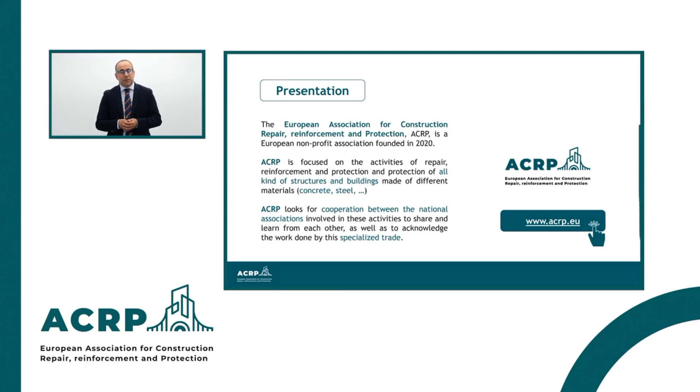So what is ACRP? It's the acronym, the short name for the European Association for Construction, Repair, Reinforcement, and Protection. It's a very long name, but it's an association that brings together everybody related to the maintenance of any kind of structure or building, no matter which kind of material. Most of the associations that are members of ACRP mainly focus on concrete, but we include everything, since some associations also do extensive work with steel and masonry structures.

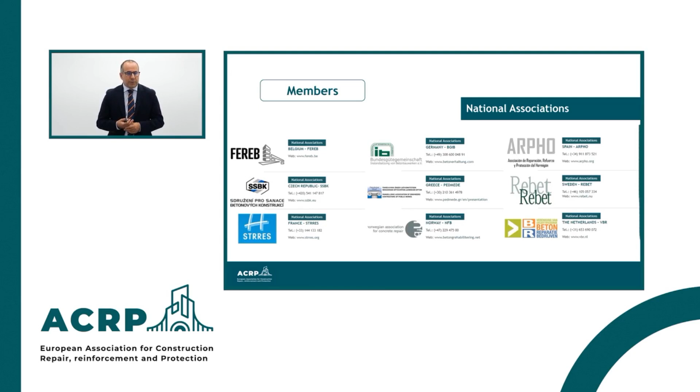This is the current membership when it comes to associations. You can see here Belgium, Czech Republic, France, Germany, Greece, Norway, Spain. We also have individual members, and importantly, from the beginning it was decided to allow institutions to become direct members, so we already have the Finnish Transport Infrastructure Agency, and we expect more public administrations to get involved.

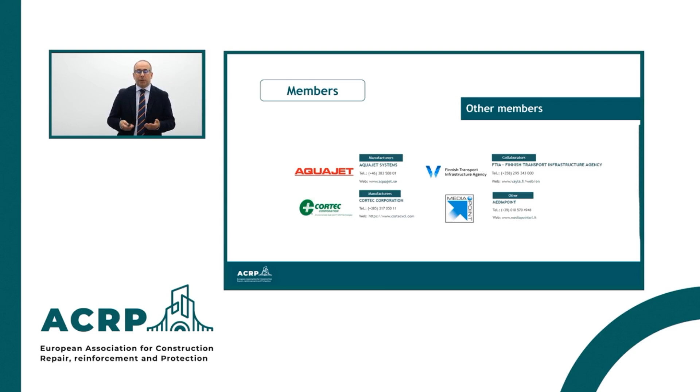To achieve our mission, which is to promote the maintenance of constructions, we need to bring together everybody: the companies that do the work, contractors, manufacturers, engineering companies, associations, asset owners, which in most cases are public administrations, and to exchange best practices, current regulations, ideas and expertise when it comes to training. Mainly, we want to create awareness about the need to maintain what we have built.

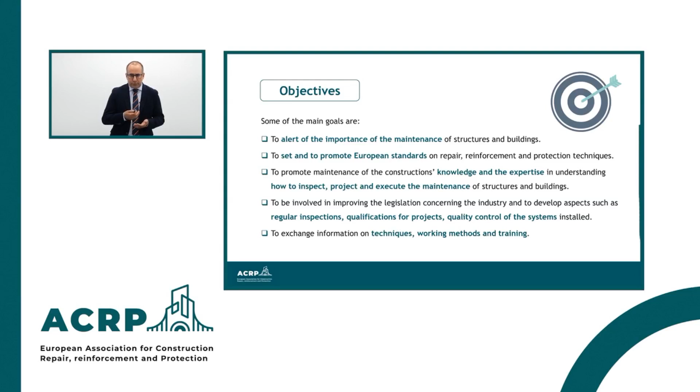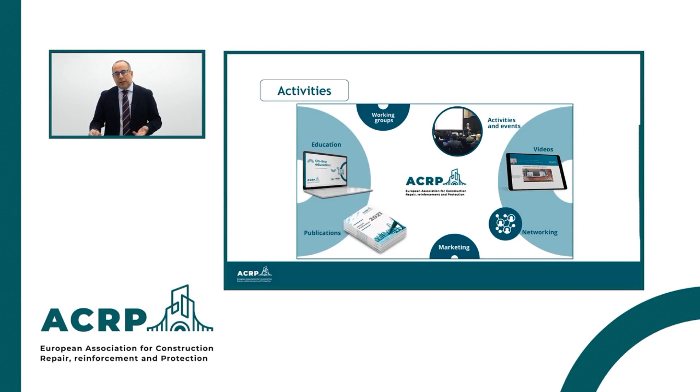So we need to develop the knowledge and expertise to inspect, to project the maintenance, and also to execute that work, through inspections, projects, and quality control. We do multiple activities: working groups, online contents, education, and regular meetings. At this point we have 3 working groups.

And I say at this point because probably next year we will have a couple more. Last year was the first year we produced the ACRP special publication. This year we're going to change the name, and it's going to become a yearbook.

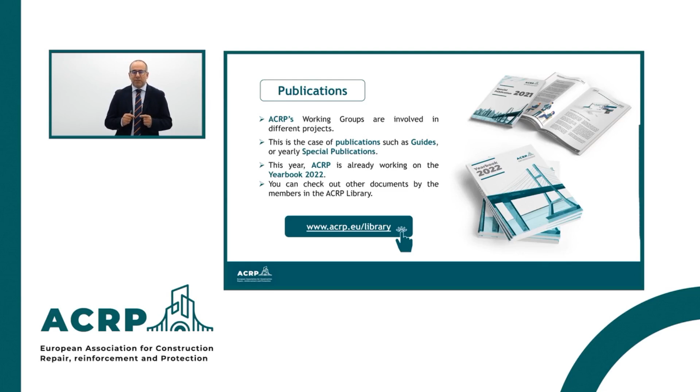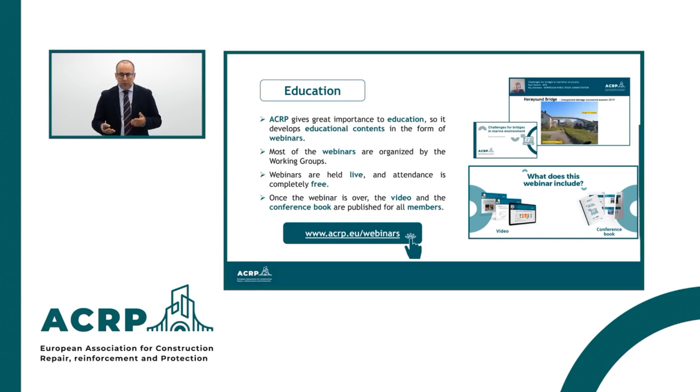We are also doing, as I said before, some webinars. The webinars are free of charge for anybody, so when they are done live, anybody can participate and watch. Once they are done, we keep the recording and the conference book, which is available for members on the website of the association.

We are producing some audiovisual materials, and we are also trying to publish audiovisual materials that have been done by the different national associations. So you can go to our website and see some of the contents that are available.

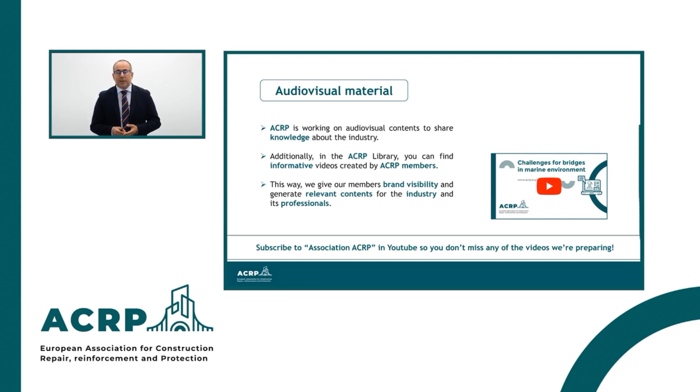Like any other association, we also want to do events, and I say we also want to do events because ACRP was started in 2019. We had a meeting to finally decide to create the association after several meetings among different national associations.

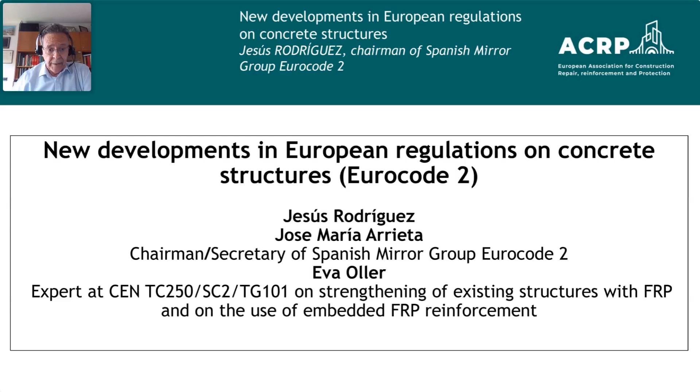Concrete is only one of the possibilities, so in each case we need to use the corresponding Eurocode. In the case of concrete, it's Eurocode number 2, together with the basis of design.

That's Eurocode 0, Eurocode 1 on actions, Eurocode 7 on geotechnical design, and Eurocode 8 on design of structures, combined with the national annexes for application in each country.

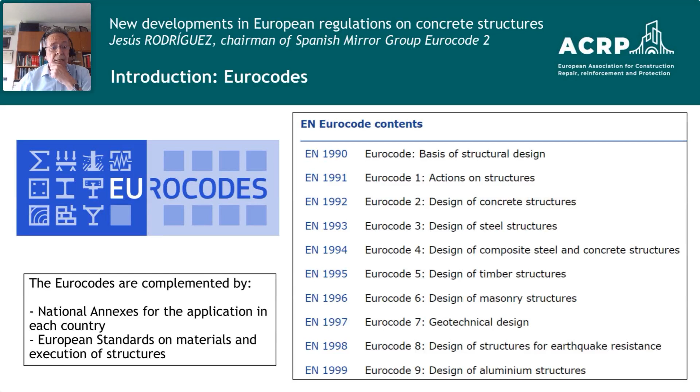And also of the European standards on materials and execution of structures. So why are we revising the Eurocodes? Because the Eurocodes exist from the beginning of the 2000s, and it is aiming to reduce the number of what are called nationally determined parameters.

These are values that can be determined by each individual country, to improve the ease of use, to incorporate the recent results relevant to innovation.

Also to incorporate everything related to the contribution of structural design to sustainability, and to provide background documents. In the specific case of Eurocode 2, we now have a background document of more than 1,000 pages supporting what is new.

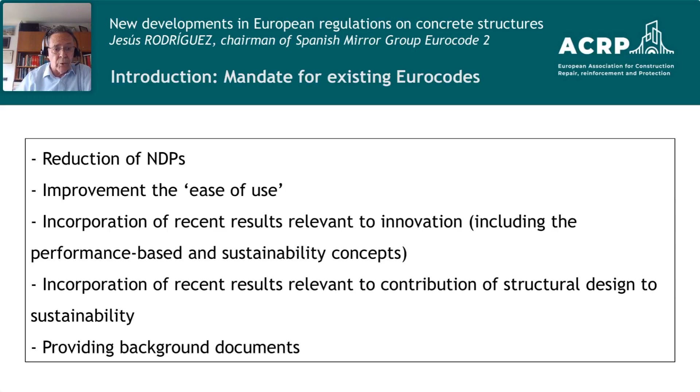What is now new in the present version of the Eurocode. So the Eurocode we are going to deal with today is only Eurocode number 2, on design of concrete structures.

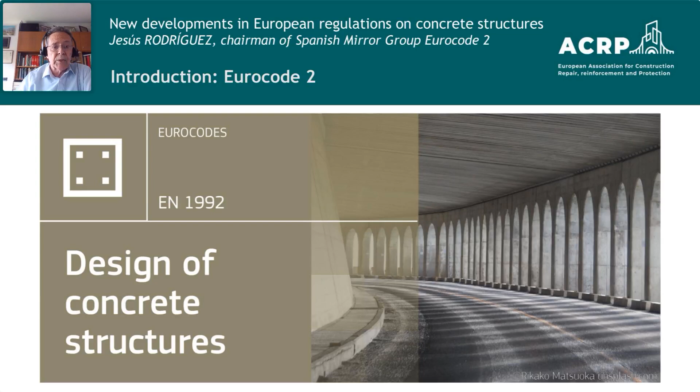And during this short webinar, between Jose Maria Arrieta, Eva Oller, and myself, we will try to present some of the main modifications.

And some of the new contents that were not included in the scope of the previously available Eurocode that was approved at the beginning of the 2000s.

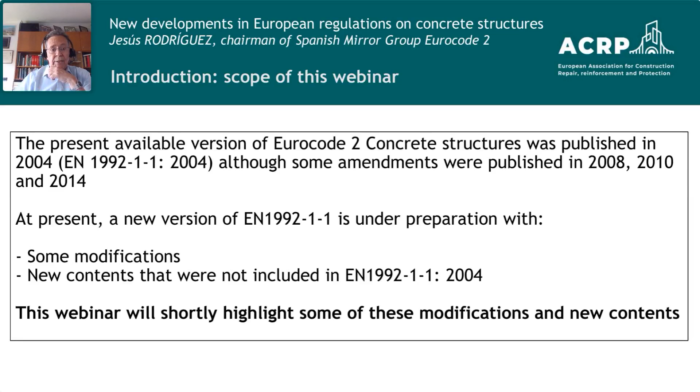So the webinar will only present shortly some of these modifications and new contents. The first group is related to those topics that were covered in the previous Eurocode.

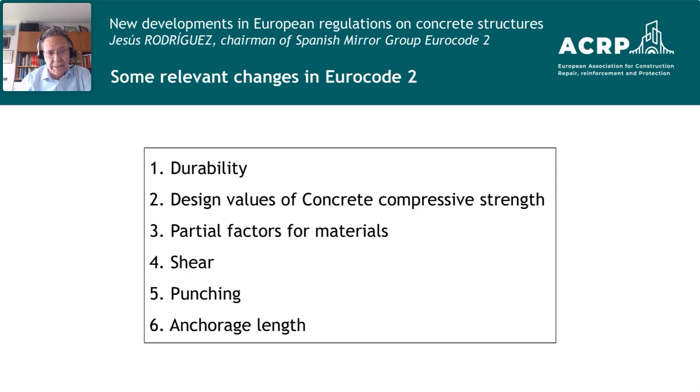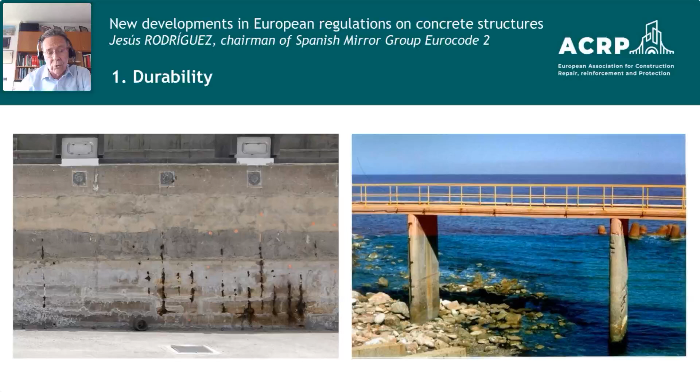So the first topic is durability, and in this case we would like to emphasize some of the questions, some of them related to corrosion of the reinforcement, although they also cover other types of deterioration in concrete structures.

So again, the Eurocode includes the exposure classes in a similar way to the previous versions, with slight modifications on different exposure classes.

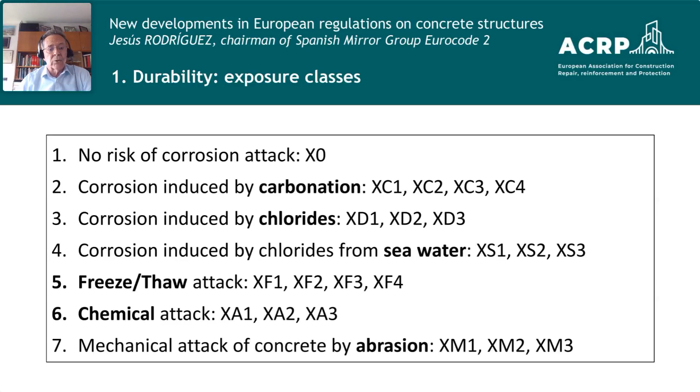Related to chloride attack, carbonation, chlorides from seawater, freeze-thaw attack, chemical attack, and also mechanical attack of concrete by abrasion. The new content of this Eurocode is related to what is called exposure resistance classes.

It's a way to define the quality of the concrete to be selected for the different exposure classes, and it is going to be related to the minimum cover size, considering carbonation and chloride damage, or also freeze-thaw, etc.

These exposure resistance classes will have their definition included in another standard, the one dealing with concrete, EN 206. It is expected, since it's still under discussion in the corresponding technical committee 104, that there will be two ways to approach the definition.

One is through prescriptive rules for mix composition, especially for conventional well-known concrete mixes, or by other ways, such as short-term performance testing.

In order to deal especially with new concrete compositions. So this is a crucial new element we need to take into consideration in the new content of Eurocode 2.

But the problem is that the definition, in order to be applied for these exposure resistance classes, is not the responsibility of Eurocode 2, but is the responsibility of the standard on concrete, EN 206.

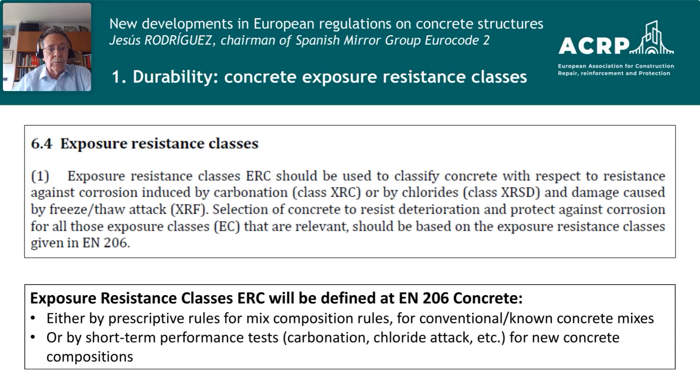So throughout these definitions, we have the typical tables for minimum cover size. In these examples, it's only for exposure classes by the attack of chlorides, but it's interesting to highlight that the ERC types...

Are defined, in the case of chloride attack, as a dimension of a diffusion coefficient in these units. And in the case not presented here in this slide, for carbonation...

This is based on the dimensions of the carbonation rate in millimeters divided by the square root of years. Well, this is a crucial new element that we are interested to finalize the knowledge on.

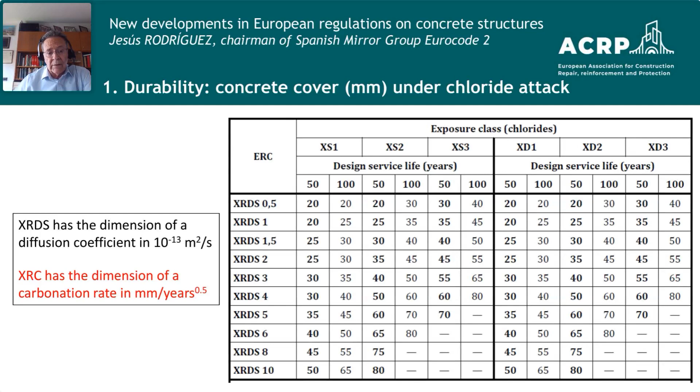This approach, which is not under the responsibility of Eurocode 2, but under the responsibility of the concrete standard EN 206. So I would like now to ask Jose Maria to continue his presentation.

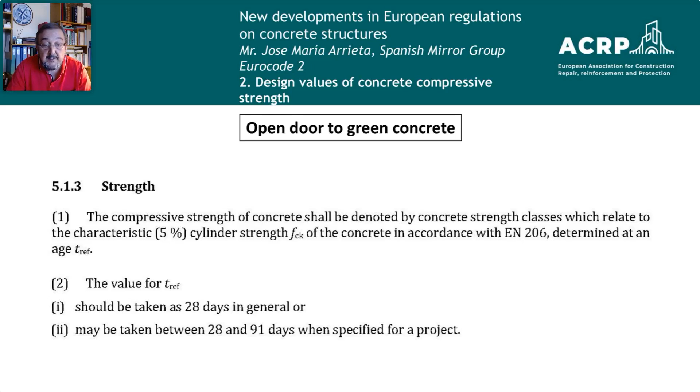The first one is the concrete compressive strength. This revision leaves the door open to green concretes' allowable age for the test higher than 28 days. Green concretes are produced replacing a portion of cement by binder like fly ash, for example. These concretes develop strength slowly, so it's necessary to test the specimens at a higher age. This is why now T-ref may be between 28 days and 91 days for this course.

On the other hand, we have unification of the design value of concrete compressive strength among the different behaviors of the structure - bending, shear, punching, etc. In the actual version, for each behavior, this design value is taken into account in a different way. We obtain the compressive strength from control specimen.

We obtain FCK from the control specimen. After that we convert this compressive strength into the undisturbed compressive strength of cylinder - that means plain concrete cylinders without reinforcement - and that conversion is made by gamma C, which takes into account not only the uncertainties of material and geometry, etc., but also this coefficient of conversion. So FCK divided by gamma C is the undisturbed compressive strength of cylinder.

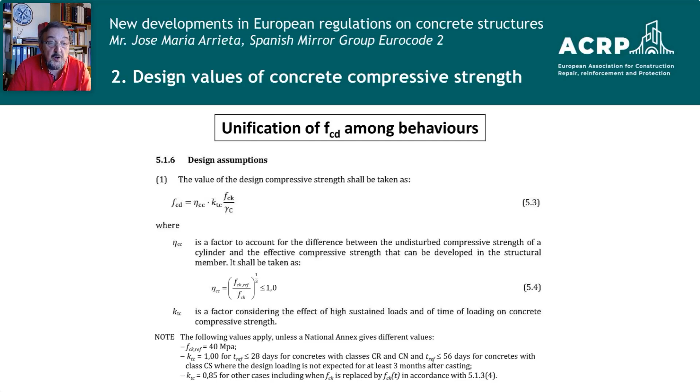Now we are going to do another conversion, to convert this resistance into the effective compressive strength in the structural member, meaning with reinforcement. When there is reinforcement, we have brittleness because of possible splitting of the concrete. So this coefficient eta CC is the conversion from undisturbed to real concrete in our structure. The expression is the quotient between resistance of reference and the characteristic strength of the test, and with that we unify this strength among all the behaviors.

Logically, when we are, for example, in bending, there is a difference. In the actual version, this brittleness is taken into account in bending, but now it's not necessary. So the formulation is easier because the limited strains epsilon C2 and epsilon Cu are now constant, independent of the class of concrete. Why? Because this brittleness has been taken into account by FCD.

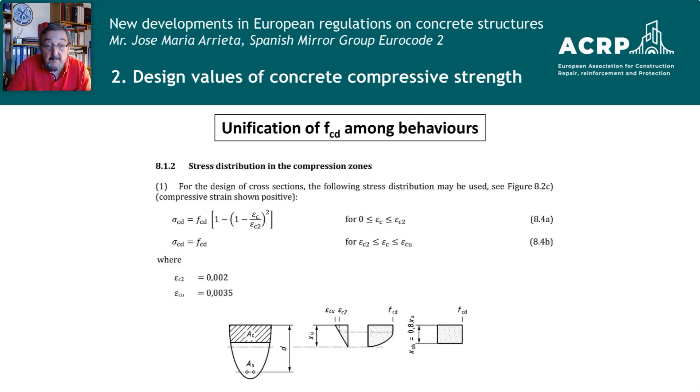Another subject is related to partial factors for materials - very important. The basic data assumes the basic coefficients of table 4.3, the usual partial factors for structures. Now we know exactly which are the conditions for this coefficient.

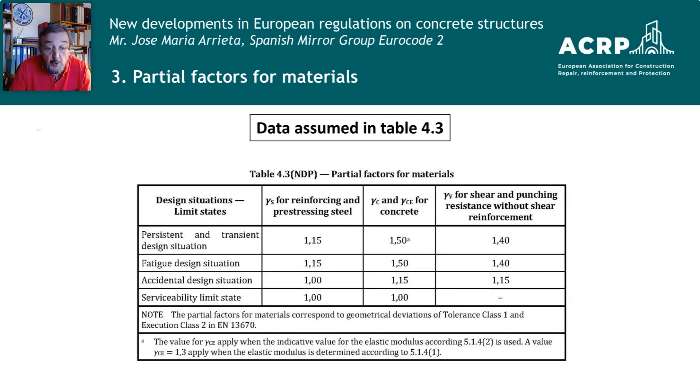We see that these coefficients correspond to deviation of tolerance class 1, execution class 2 in EN 13670, the execution of concrete structures code, and also correspond to some statistical data of the variables with the coefficient of variation and the bias factor. So, for example, for yield strength we have the coefficient of variation, also for the depth, also for the model uncertainty. With these values we obtain the coefficient of table 4.3.

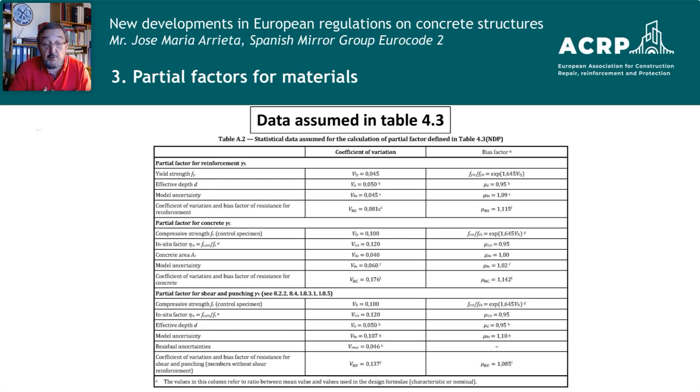That means that if our statistical values are different, since there is a procedure to calculate this gamma coefficient, we can modify it if, for example, our production of concrete has a coefficient of variation less than 0.10, as is supposed. This expression is all developed in Annex A.

We can see the different variables: the sensitivity factor, which usually is 0.8, the beta target, the reliability index, which usually is 3.8, and the coefficient of variation and the factor of bias of the resistance. With that we can reformulate, recalculate this coefficient.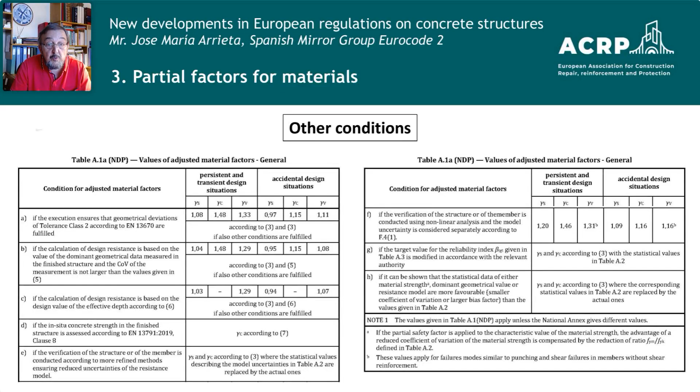In condition D, there is another typical situation of existing structures. If we use core test, then we must reformulate the partial coefficient of the concrete, and you may find the instructions to do that. A particular case which improves the results is, for example, the use of a design value of the effective depth instead of a nominal value.

If we use this effective value, calculated by the difference between the nominal value and a deviation, which in reinforcing steel is 15 millimeters, then we can reduce the coefficient. For example, you can see the partial factors of the steel, we can reduce from 1.15 to 1.03. All that makes it adaptable, all the partial factors to each situation, and that obviously reduces the quantity of materials and goes in the direction of sustainability.

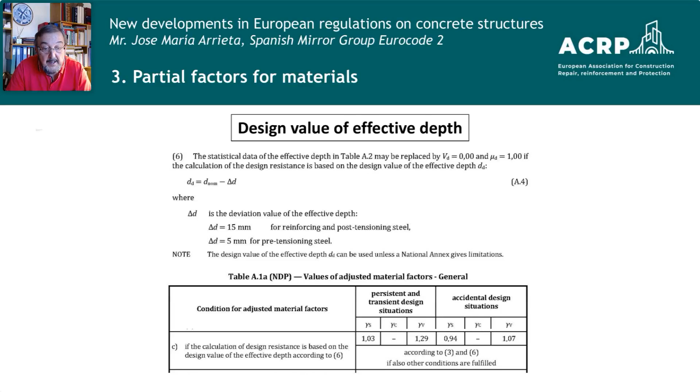Then finally, my third issue is the shear. First, I'd like to say that we have preferred in the European Subcommittee the physical models over the empiric models, and then in shear and punching we use two physical models: one for shear for structures without shear reinforcement, and the other for structures with shear reinforcement. Both are based on Model Code 2010, and the first one corresponds to the concrete critical crack theory.

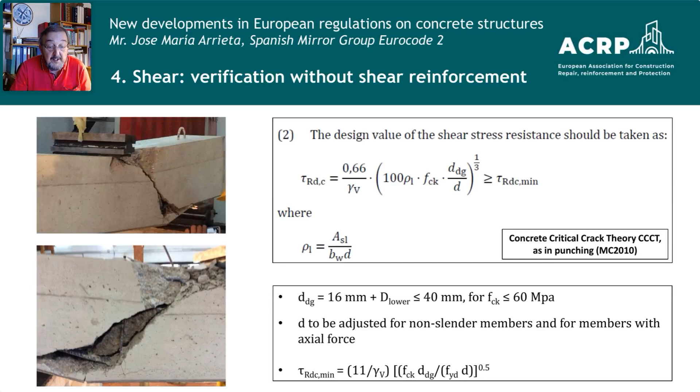which is applied to obtain the expression. You see the expression of the shear stress resistance. You can see this fraction dg divided by this is the size effect, and you can see a partial factor different, gamma v, which really is gamma c, the partial factor of the concrete. What happens then? There has been a calibration of the formula of shear, and it has been obtained that it was possible to reduce the partial coefficient of the concrete for the shear and for the punching, and its new name is gamma v. With this value, the result is quite more accurate.

The other situation is when there is shear reinforcement. Then we apply the model of compression field theory. That's to suppose that the web, there is a compression field in the concrete with a determined inclination, and based on that, we can obtain the formula for

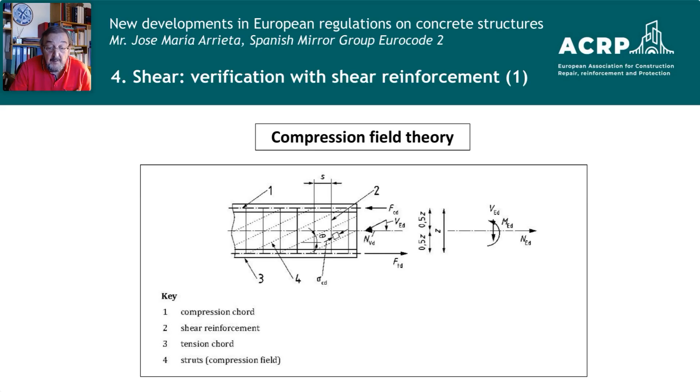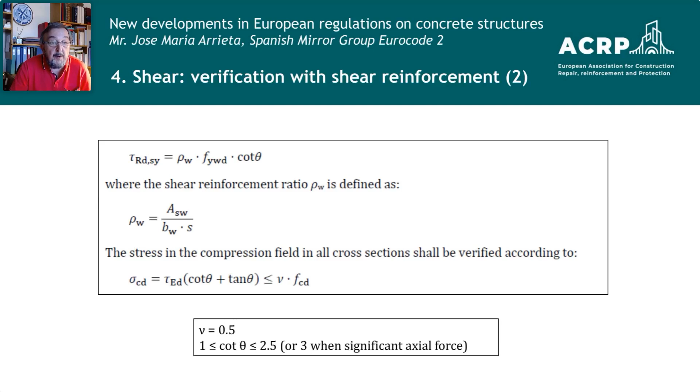the shear reinforcement. Really, for the first equation gives the resistance due to a reinforcement rho w, and then in the last equation we can obtain the compression stress on the web, on the concrete, that we must verify is less than nu multiplied by FCD, which represents the effect of the transverse strain on the compression field. And I finished my part, so Jesus will go on.

Thank you, Jose Maria. Just to introduce a minor note, when preparing the three of us for today's presentation, it will perhaps clarify that behind the new version of Eurocode, most of these news are introduced in the background document. There is a lot of new work, new tests, new calibration of tests for the sake of trying to get an ease of use and a better way to save and reduce the amount of material needed while maintaining the level of safety required.

Moving to the next topic that was also covered in the previous Eurocode, and there are important or relevant changes. The topic now is punching. Punching has produced some concern in the past, and during the life of the present Eurocode, there was an amendment in order to reduce the maximum punching resistance, etc., because there have been some accidents, and there are some concerns at European level. So although this is a European webinar, for those based in Spain, this is also related to the situation in Spain, which produces an even a bit more reduced situation than the present Eurocode.

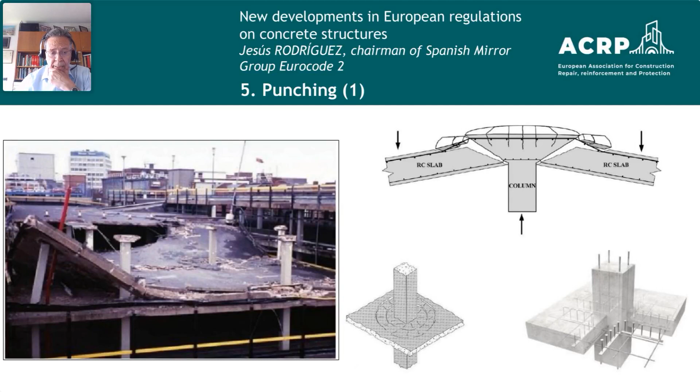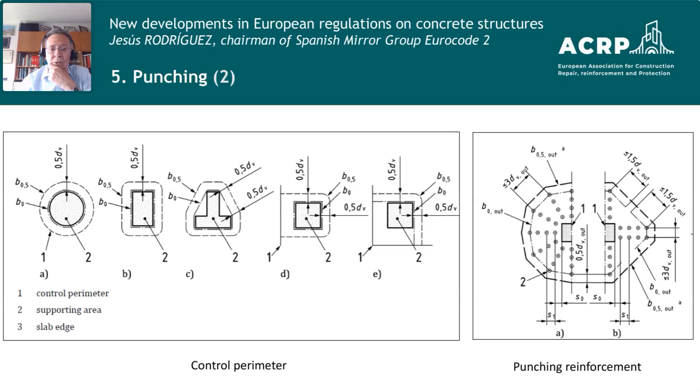So we have to verify the typical verification of the punching perimeter. In this case, it has been established at a distance of 0.5 the effective depth of the different columns, and then of course we are also obliged to verify the external perimeters in order to define the extension of the reinforcement. So as in shear, we have the concrete critical crack theory, and we have a very similar expression for the resistance, the shear stress resistance, the shear strength of the concrete when there is no reinforcement, no punching reinforcement, where, as always, the ratio of reinforcement needs to be taken into consideration

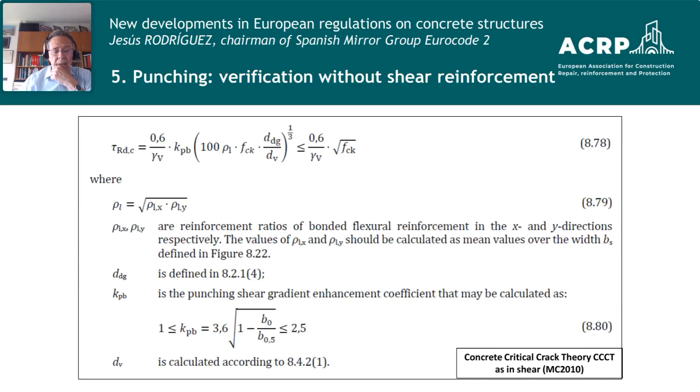at always the rate of reinforcement in both directions of the slab. So this is a very similar approach to the one presented by Jose Maria for concrete, in the shear. So then when there is a need of including reinforcement, we have a typical formula of addition of the resistance without reinforcement and the new participation on the resistance due to the new reinforcement. And we have here the definition of the different coefficients that I am not going to enter into detail, and the definition or the value of the shear reinforcement needed in order to resist the shear value.

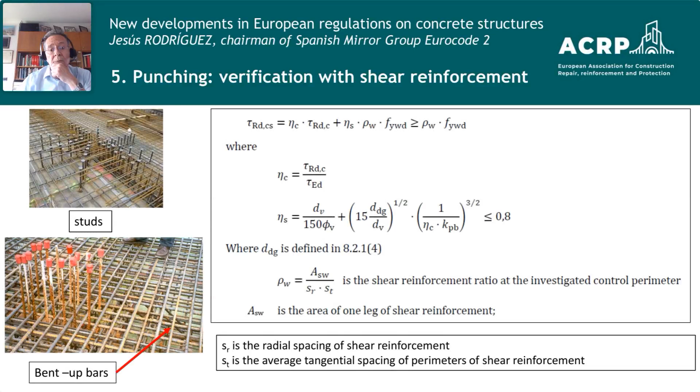I would like to highlight that today we think reinforcement using this type of studs will become more familiar than in the past in different countries, due to several facilities to fulfill requirements like shear reinforcement distribution and maximum distance between reinforcement. So against typical bent up bars or stirrups, we believe the use of this type of studs will become more familiar.

A hot topic of concern at the European level has been the maximum punching resistance, placing as much punching reinforcement as needed. There is a maximum value that we cannot overcome - eta sys times the resistance when there is no reinforcement. This eta sys is different if we are using studs or links and stirrups. This is a critical discussion.

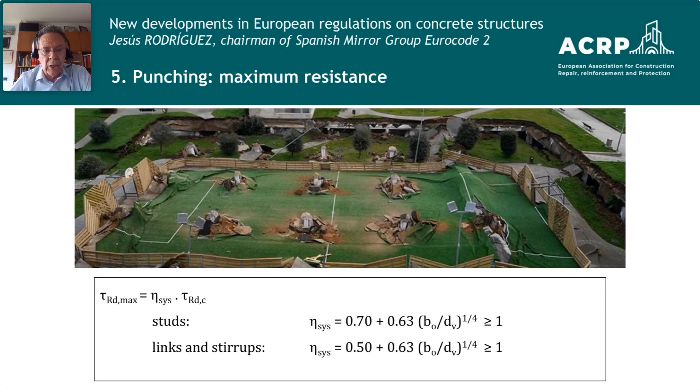There is an additional possibility to increase these values, taking into consideration the membrane effect. For new structures this will be included in a note, and it's up to each country whether to use it to increase punching resistance capacity. It is clearly stated for existing structures, but for new structures it will be up to each country to apply or not this improvement. Otherwise, this limitation will limit the size of the column with regard to the effective depth of the slab in some designs.

The last topic covered in the past with new approaches is the anchorage length. The first new thing is that the anchorage length will be equal to the lap length. This is a new approach. We from Spain have some concern about this, but in principle, although it will be possible to modify at national level, this is the approach that will be included in the Eurocode, when some conditions are fulfilled.

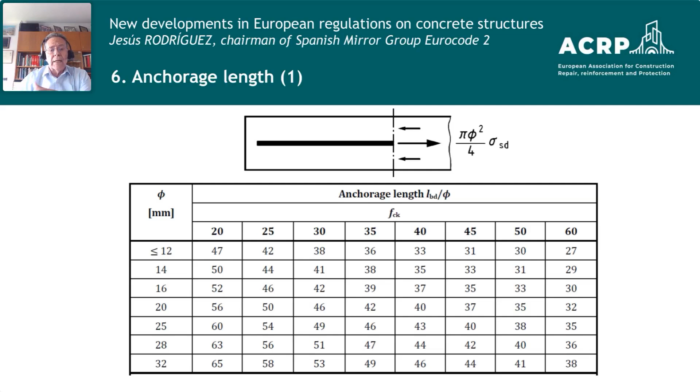The anchorage length and lap length are written with regard to the diameter, depending on the concrete strength quality. So in the case of 25 megapascals for buildings, with a bar of 20 millimeters in diameter, it will be 50 times the diameter. When we don't fulfill the general conditions to use this table, there is a formula to obtain a more precise anchorage length and lap length, taking into consideration not only the diameter but also stresses in the steel, concrete quality, and corrections depending on diameter versus cover size.

There is more information that for lack of time I am not going to present. There are new formulas to take into consideration improving and reducing the length of the anchorage due to external pressure.

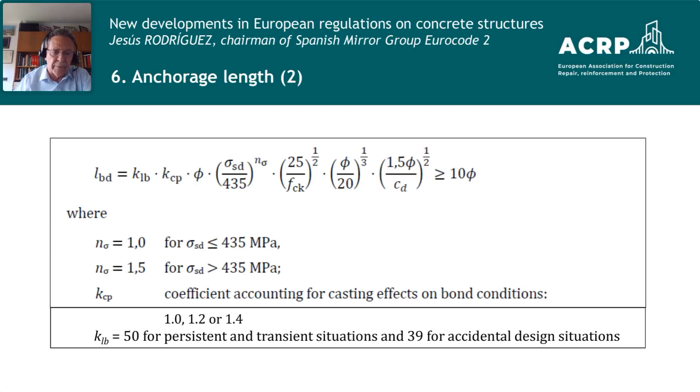With this comment, we finish the main topics we were planning to cover in this short webinar related to topics covered in the present Eurocode that are being modified. There are more, but for our view these were the main ones.

Now we are moving to the second part of the presentation, where we will present news related to the new scope of Eurocode number 2 - topics not covered at all in the previous Eurocode. There are six topics we will try to cover if we have time: assessment of existing structures, strengthening, use of non-prestressed glass and carbon reinforcement instead of steel reinforcement, stainless steel reinforcement, steel fiber reinforced concrete, and recycled aggregates for concrete structures.

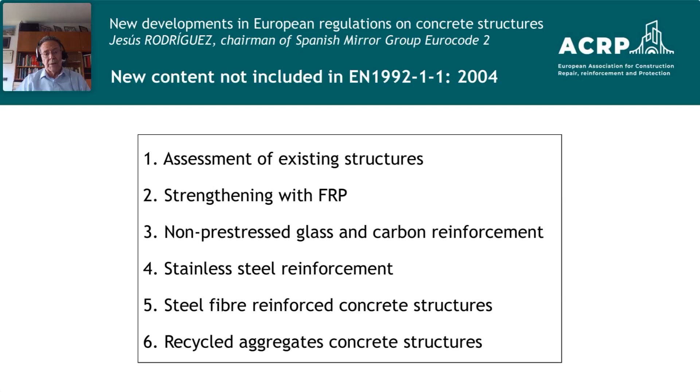Related to the assessment of existing structures, there is an annex dedicated to that, defining the scope. There are additional rules covering materials and systems not defined in the present Eurocode - for instance, the use of plain bars. Plain bars are not covered in the main text of the Eurocode, neither the previous one nor the future one, but this annex will give information on how to deal with plain bars in existing concrete structures. There are additional rules for when the structure doesn't fulfill detailing rules, which is very typical, included in the new Eurocode in chapters 11 and 12.

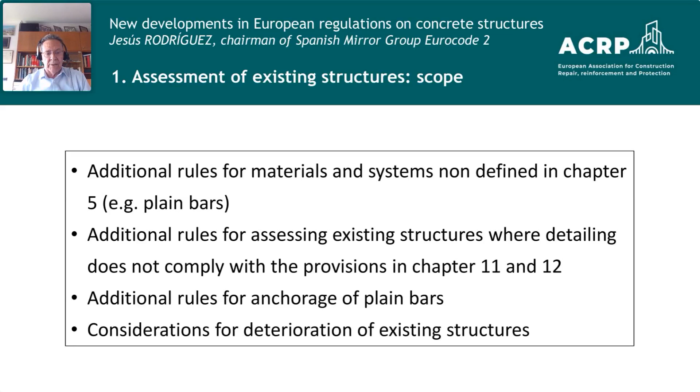Additional rules also for anchorage for plain bars, and consideration - and this is an important topic - for deterioration of existing structures, only consideration. The main limitation of the new Eurocode is that there is not still a European agreement at the level of a standard in order to include a precise quantitative way to deal with deteriorated concrete structures affected by corrosion. There are several topics to be covered in this annex on existing structures.

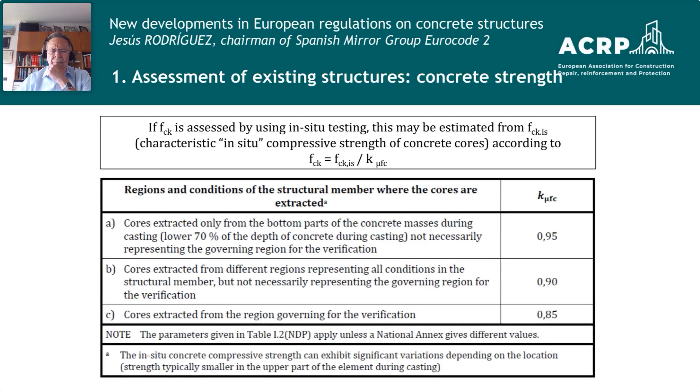This is an example on how to deal with the characteristic compressive strength of the concrete coming from drilled cores, and depending on the conditions of these drilled cores - the position, the amount, etc. - we have a coefficient in order to obtain, from the characteristic in situ compressive strength of the concrete cores, the characteristic compressive strength to be used in the calculations.

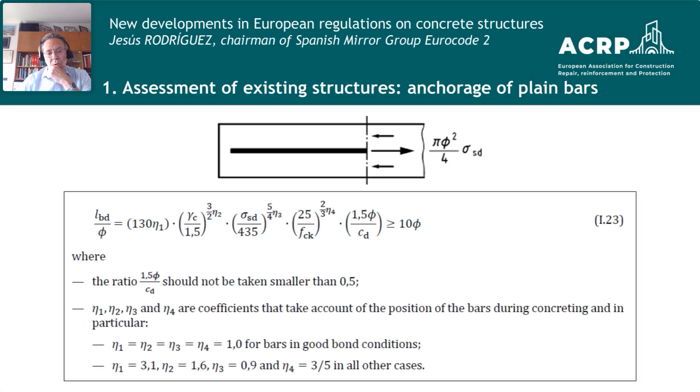This is the example of the rules in order to deal with the anchorage length of the plain bars, which are not covered in the main text. It's a similar expression to the one for ribbed bars, but in this case with modifications in order to take into consideration that they are not ribbed bars, they are plain bars.

In relation with corrosion, although it is said that there are only general considerations, I would like to highlight that we are covering some recommendations on how to deal with the reduction of the concrete cross section and the steel cross section. In relation with the concrete cross section, there is a recommendation to consider the complete concrete section but with a reduced value of the FCK when there is not a high level of corrosion - we can consider all the section, but with a reduced compressive concrete strength due to the presence of cracks. When there are high corrosion values or relevant crack widths higher than 1 millimeter, we need to consider the possibility of spalling of the concrete and consequently use a reduced concrete section.

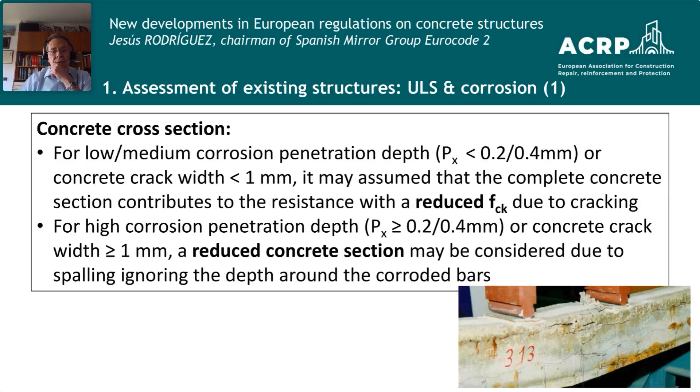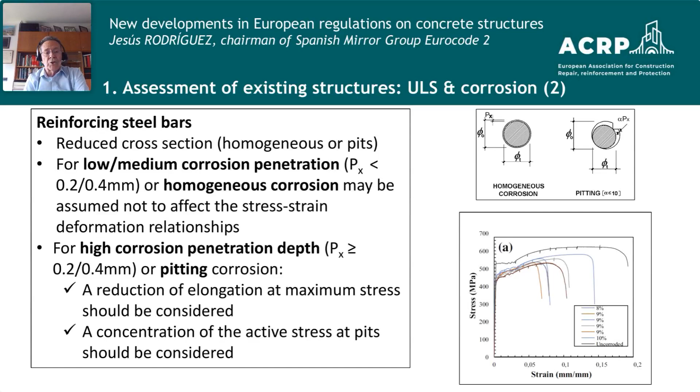In the case of steel, we need first to consider the reduced steel cross section, either in homogeneous corrosion or in concentrated pits. Then we also have to deal with some recommendations about the stress-strain relationship. If there is a low level of corrosion, or homogeneous corrosion, we can consider that there are not relevant modifications in the stress-strain deformation. However, if we have high corrosion penetration depth or pitting, we need to consider some reduction, at least in the elongation at maximum stress, and also consider some added stress at the pits.

But these are only general considerations, and this is, I believe, my last presentation on this part. For the case of possibilities of premature failure of stirrups due to corrosion - stirrups being the thinner reinforcement - we need to consider, in compressive bars, the possibility of buckling, and in shear behavior, the possibility that a premature failure of one stirrup can allow the shear crack to be produced with a reduced strength in shear.

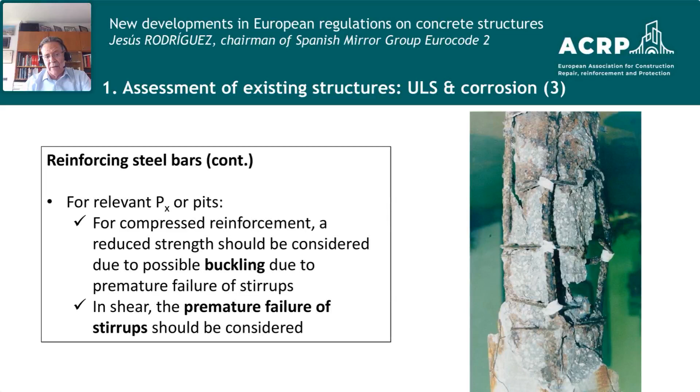For the first time, Eurocode 2 will include an informative annex, Annex J, that will deal with strengthening existing concrete structures with carbon fiber reinforced polymer laminates, known as CFRP. Adhesively bonded reinforcement will be like the umbrella for the two technologies used for this type of strengthening: externally bonded reinforcement, which consists of gluing a CFRP strip, CF sheet, or pre-impregnated laminate to the surface of the concrete element; or near surface mounted reinforcement, which consists of performing a slot cut in the concrete cover and then embedding a CFRP strip or CFRP bar.

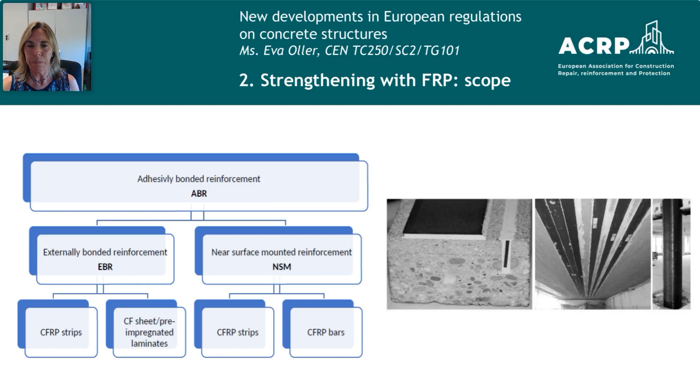Shear strengthening is required if the average shear stress is larger than the shear strength of the original reinforced concrete element. There are different configurations considered in the Eurocode: one is fully wrapping the section, the other is a U-shaped configuration. Both can be discontinuous or continuous along the element, depending on the shape of the section. These configurations are also the same as for confinement of concrete columns. Different formulations have been included in the Eurocode in order to assess the total shear strength, including the contribution of this FRP, and these formulations are based on existing German guidelines.

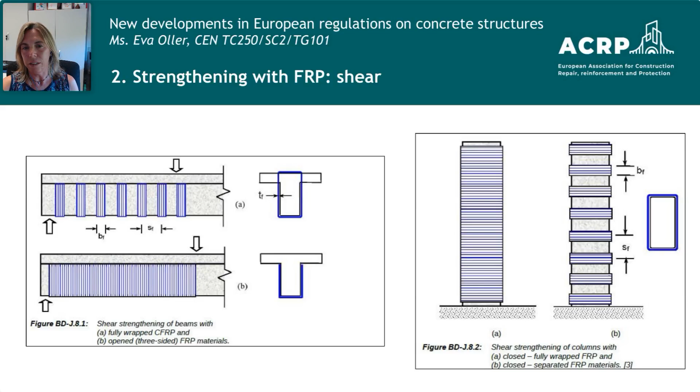In relation to flexural strengthening, it consists of bonding an FRP laminate to the tensile face of the beam in order to have an additional reinforcement. To design this type of structure, we can consider the laminate as an additional reinforcement, but with a linear elastic behavior.

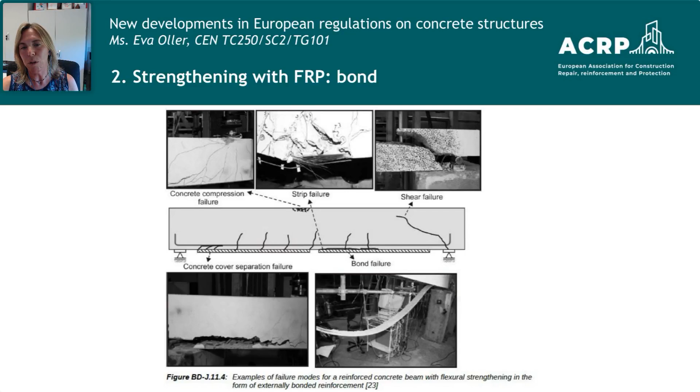The only point is that in most of the existing research, it has been observed that by bonding this type of laminate, we can reach a brittle failure mode, which consists of debonding of the laminate at the laminate end, or initiated between cracks, which is called intermediate crack debonding. So during design, we should check that this type of failure is not going to occur.

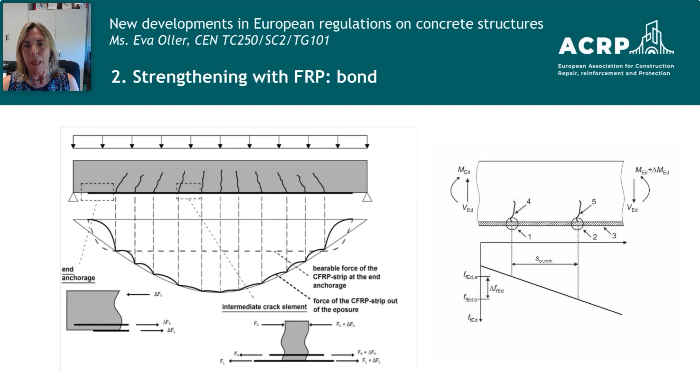For this purpose, we need to check the end anchorage. We should check that the force transferred by the laminate to the concrete, in between the laminate end and the first crack, is properly transferred to the concrete. And also between each pair of cracks, we should check that the increment of tensile force between two subsequent cracks is properly transferred by bond to the concrete surface. By doing so, we are going to guarantee that this type of failure is not going to occur.

In addition, there is another annex that also, for the first time, includes in Eurocode the FRP embedded reinforcement. There are different types of embedded reinforcement considered: the ones made with glass fiber, basalt fibers, or carbon fibers. And here in this table, which is in the background document, we can see the huge range of the different parameters, such as the modulus of elasticity and the characteristic short-term strength, for instance, for the different types of materials considered.

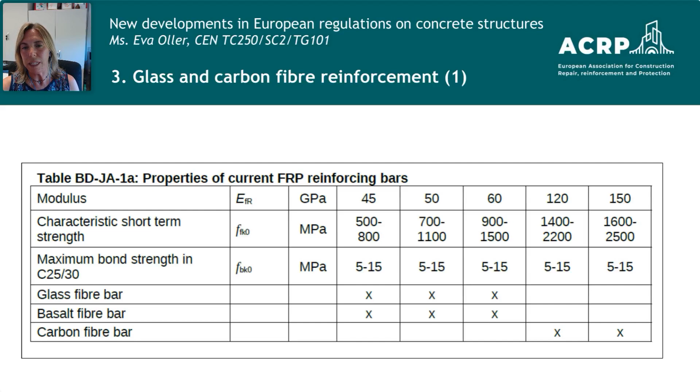This type of reinforcement is going to be used instead of the conventional steel reinforcement, and is very useful, for instance, in aggressive environments, because it is not susceptible to corrosion, and it's linear elastic up to failure.

The only point is that it has been observed that this type of reinforcement decreases its tensile strength over time. So for design, we should consider the long-term strength that can be obtained from the short-term strength by applying some parameters that depend on the temperature, on time, and also on the environmental conditions.

And instead of applying this type of parameters suggested by the Eurocode, we can also perform long-term tests in order to obtain the long-term strength that is going to be used for the design with this type of reinforcement. And this type of reinforcement is only recommended for tensile reinforcement, not for compression.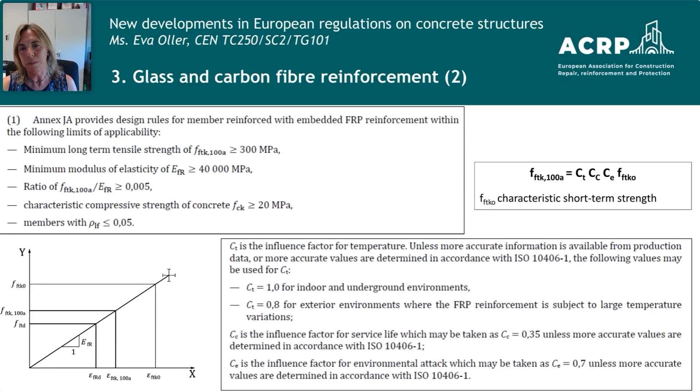And Jesus, if you would like to continue.

Thank you, Eva. Well, the last part of the presentation will cover another three areas of topics that are also new in the present technical draft version, which is still under final adjustments for preparing the final document to be submitted to the CEN for formal vote by all the countries.

And one of the topics is that it is considered, also for the first time, the stainless steel reinforcement for concrete structures. So it is defining the different types of stainless steel with regard to the pitting resistance equivalent.

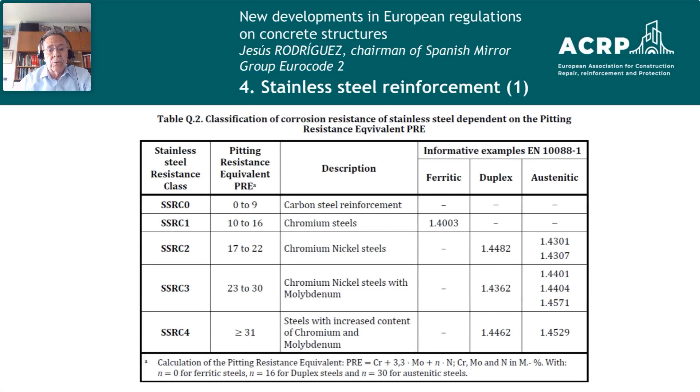And then we also have, among other content, a new table for minimum cover size of this type of stainless steel bars when they are used in concrete in different environment conditions. So there are reduced values with regard to when we are using conventional rebar. This is one of the new topics.

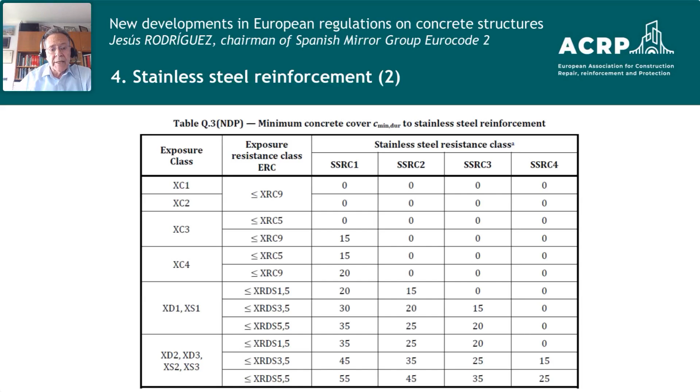The second one, although in some national codes we have been using it in the past, is also new in the Eurocode: the use of steel fiber reinforced concrete structures. It was agreed, with some discussions, that only steel fibers would be included. There are some approaches and movements to include other types of fibers, but at the end, in the present technical content of Eurocode to be submitted for votation by the different countries at the beginning of next year, only steel fiber is included.

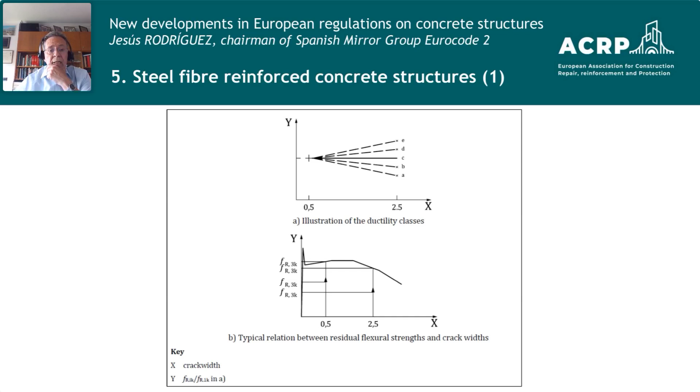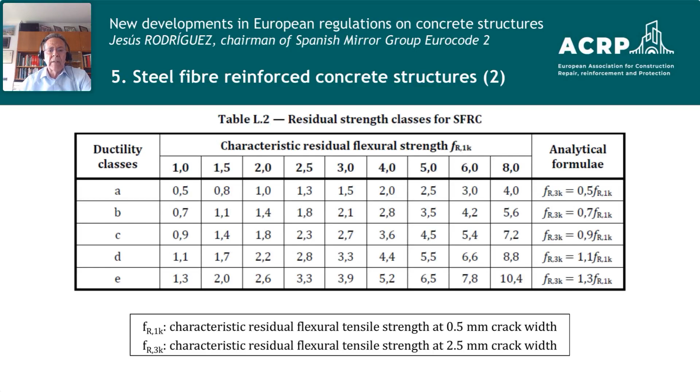So the steel fiber reinforced concrete is classified depending on the ductility, measured by the tensile strength when a crack of 0.5 millimeters appears, or the value when the crack reaches 2.5 millimeters. And as a function of these values, we have different ductility classes, with the value of the tensile strength at 0.5 crack width, and the corresponding values for fiber concretes with different ductilities at 2.5 millimeters crack width. With these values, it is possible to introduce this type of concrete into the different calculations.

Well, one interesting topic, at least in my experience, is that there is going to be an approach to consider the fiber orientation in the use of reinforced concrete with fibers. There are at least two concerns: one is whether we have the amount of fiber required, and the second is whether the distribution and orientation of this fiber is adequate.

So this is considered in the design of the residual tensile strength with this first coefficient, K0, to consider different situations where the fiber orientation can affect the tensile strength.

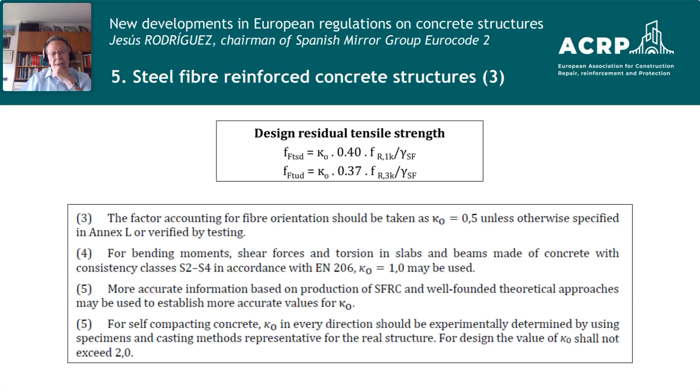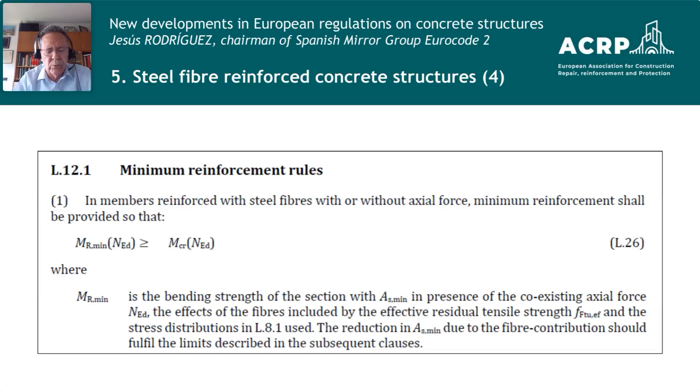And there is another interesting topic on this annex. There are a lot of topics. One is, what is the minimum conventional reinforcement in flexion, in bending, when we are using fibers? There is an approach in order to decide that we need to have a minimum conventional reinforcement to deal with the cracking bending moment, when in this cracking bending moment, it is considered the strengthening due to the content of fibers in the concrete.

The last topic today, before asking Maria to coordinate the questions and answers, is related to the use of recycled aggregates in the concrete for concrete structures. This is also a topic that in some national codes had been included and considered in the past, but this is again new in the new Eurocode.

So there are two types of recycled aggregates, A and B, defined depending on what these recycled aggregates are coming from. In the case of A, it is a high quality aggregate, and we have here recommendations. In the case of B, this recommendation needs to be reduced by 50%.

It is said that in the case of A recycled aggregate, replacing less than 20% of the total aggregate, we can maintain the conventional approach of the concrete without recycled material. In the case of an amount between 20 and 40%, there is information in this annex on how the conventional values need to be reduced.

And finally, we have more than 40% of recycled material. In that case, we need to test and verify the properties through testing. In the case of pre-stressed concrete, the amount is reduced.